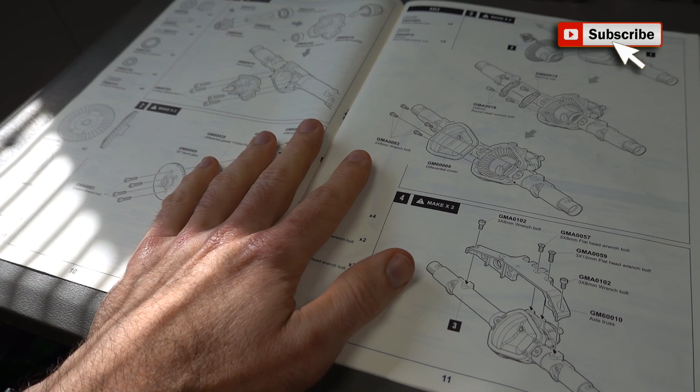GOM rock buggy kit. This is a plus kit, it comes with additional parts and all that kind of stuff. I showed that in the previous video, go check that out if you want, just a quick unboxing.

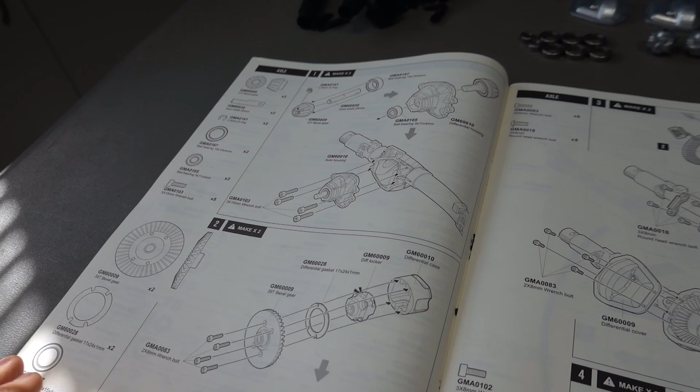But we're going to start building this kit. First up, we have to make the front and rear differentials. It says here on top you have to make 2 of each of these. So I've got all the parts nicely laid out there.

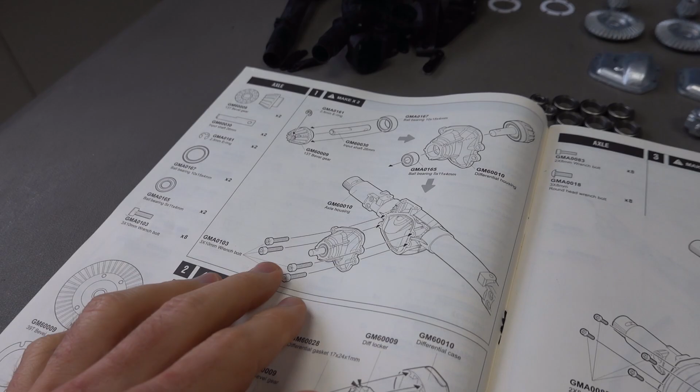Using my Team Fast Eddy grease, but you can use any grease you want, even marine grease if you want to run it through water. I have all the parts here, I'll start going through all of these and putting them together, and I'll show you the step by step in between. I like having everything set out, ready to go.

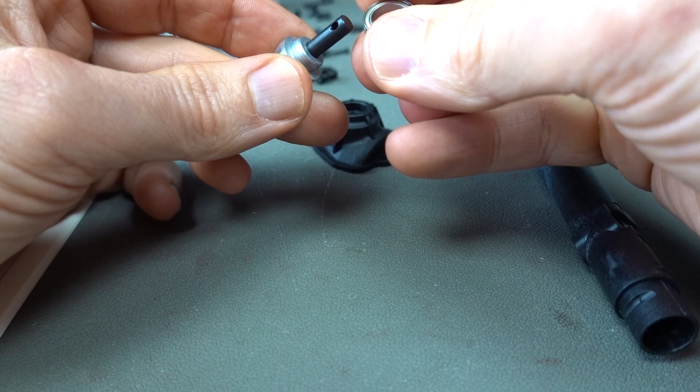Let's get cracking. So first up here we've got our little input shaft, and then we get our 13 tooth bevel gear. Lock it off with a 2.5mm E-ring. Put it over a 10 by 15 by 4 ball bearing, just like that, so it spins.

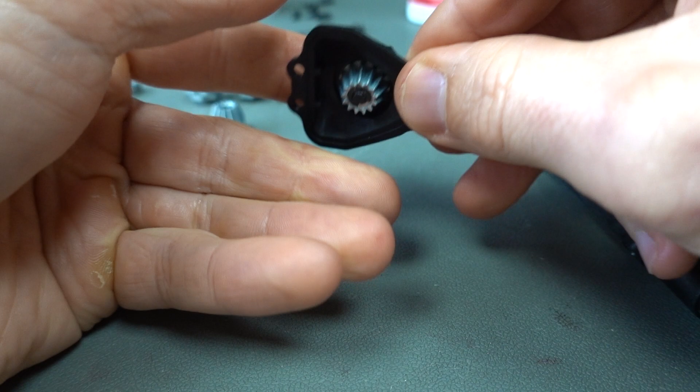And then we get, this is your differential housing. They're identical, so basically you slide this end in, line everything up, push it in there like that, and then lock it off on the other side with a 5 by 11 by 4mm bearing, just like that.

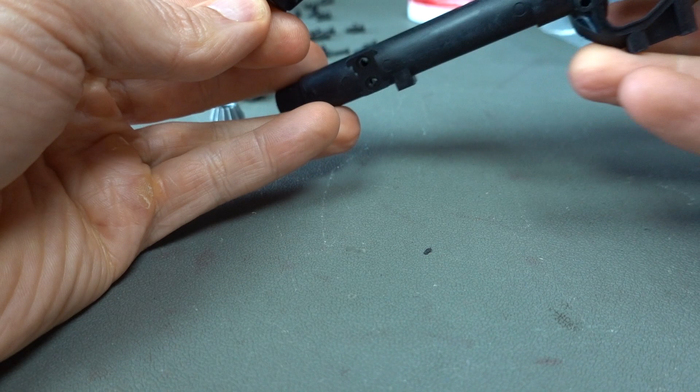That's it, so you're going to make 2 of them. Then get your axle housing, this guy right here, line it all up like that and screw it down. They use 3x10 wrench bolts, make 2 of those. But there it is, that's that first step done. That's what you're left with.

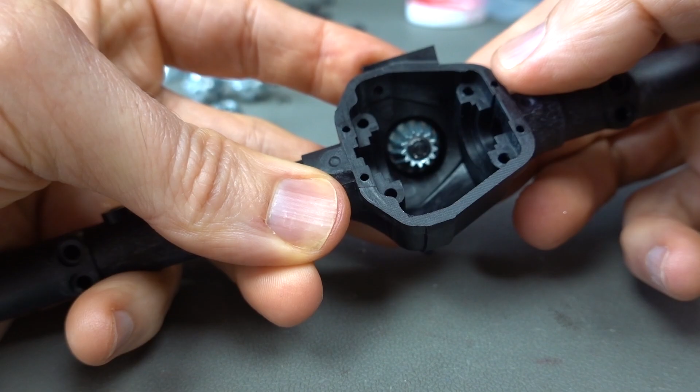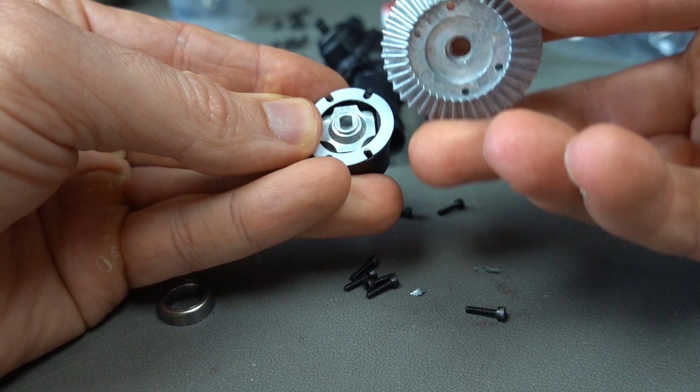Pretty simple. Next up we're going to be making the actual differential case. Basically you get your differential case, these are identical, the diff locker on either side. Slide it into those grooves, get your gasket, just like that, and then you get your bevel gear, line it all up and send it home. You've got to use these 2x8mm wrench bolts for all those, and that's it.

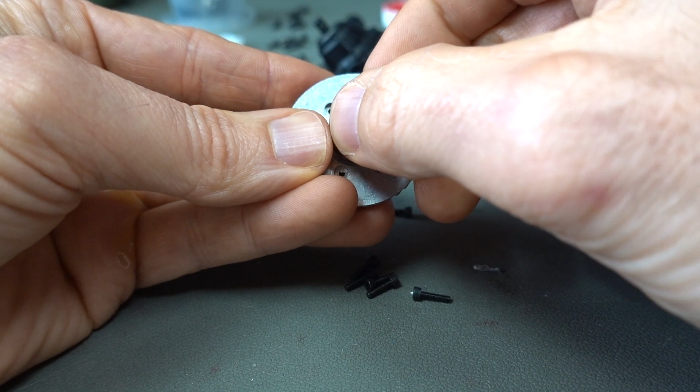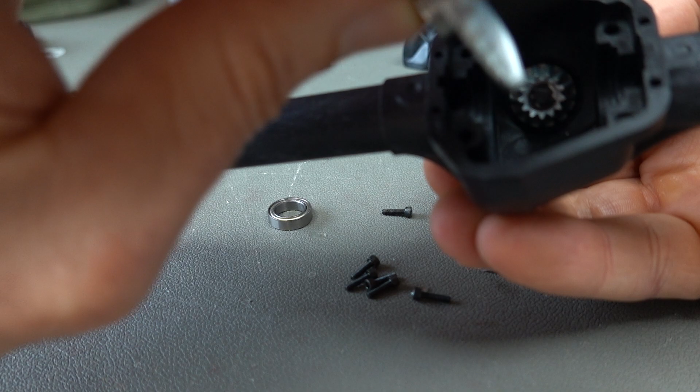And on either end here, you use your 10 by 15 by 4mm bearings. Once that's done, like any typical diff, you're going to slide that into there and cap it off with 2 of these bearing caps. I'll put all those in, I'll show you, and obviously you're going to grease it up, and that's that. There we go.

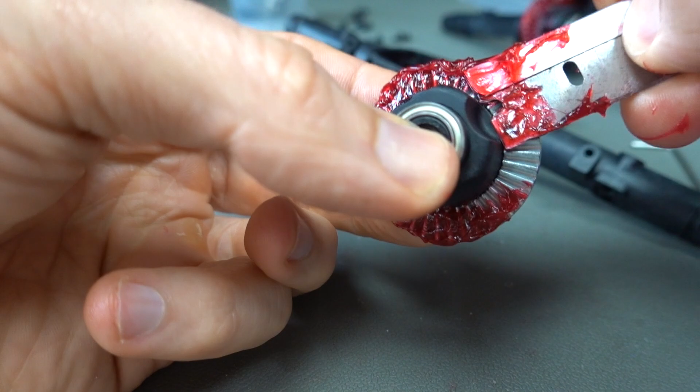You pack it up as much as you want, it's not really going to hurt. We just want to pack the hell out of it. This is all I do, I'm going to get this flat blade, old razor, and just kind of run it around the edge there. That's it. Obviously if you put more in there, it's going to waterproof it, depends on what you use.

If you use marine grease and all that kind of stuff, it can only go one way, just like this. That's it.

Like butter, that's it. Now we're just going to get these, they're called bearing caps, and they just sit in there, and we're locking them with 2x8 wrench bolts.

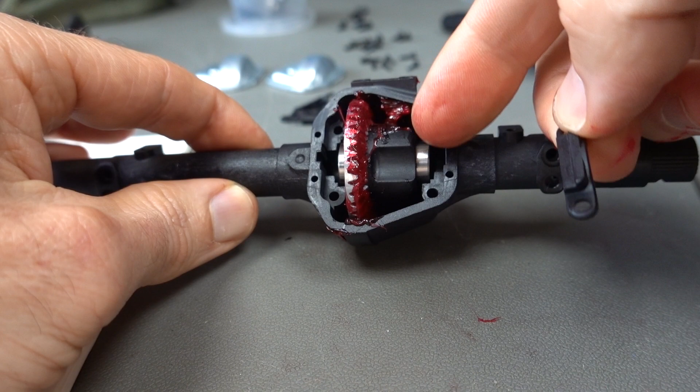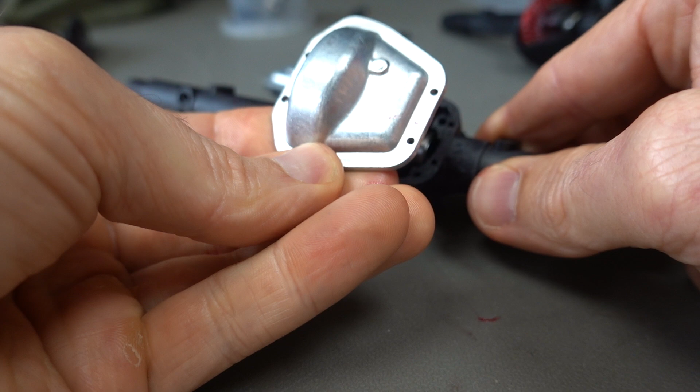Then what we can do, once that's all on, I get the pumpkin here. There we go. Sorry, I lock these away with 3x8 round heads, and then we use the wrench bolts to lock all that in, and that's the front and rear diff done. There we go, both of them are made.

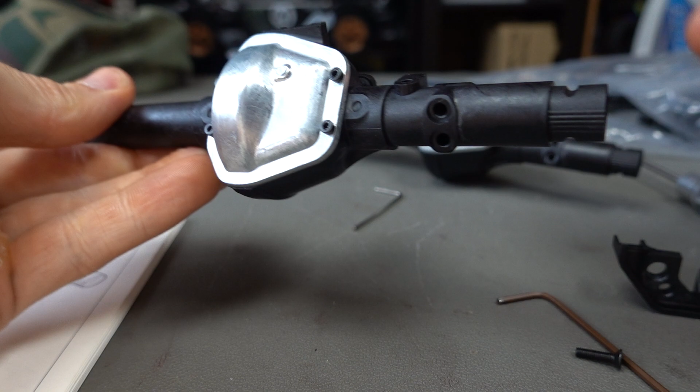Jump to step 4, which is this called an axle truss. Here's one without it, and basically it just sits on top of here and ties everything together. Now you've got to make sure when you put this guy on, it sits on there like that.

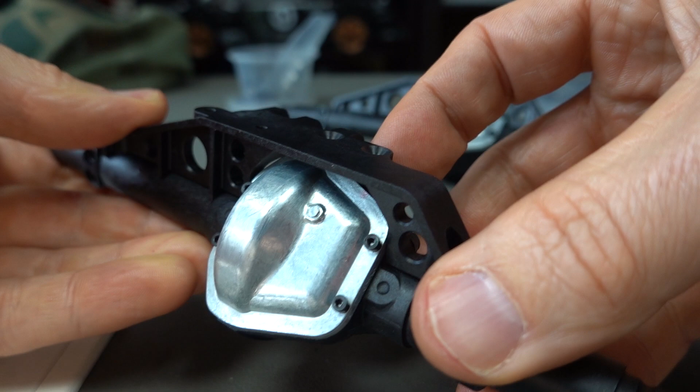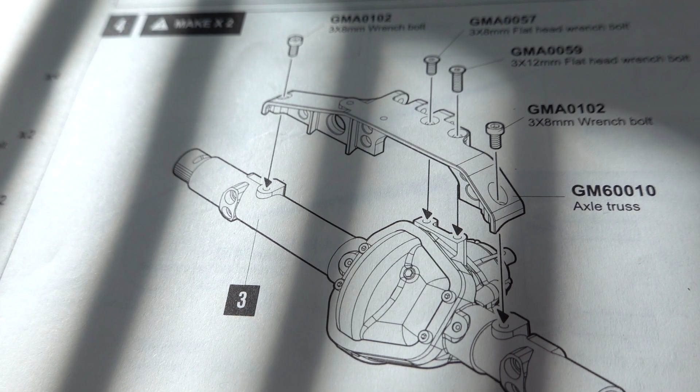It's pretty self-explanatory. The only thing to take note of is these 2 screws up here are longer, and there's a shorter one. So the longer one, see, it's got more thread, it goes in this one up here, and they're both countersunk, and the shorter one goes the other side. Pretty self-explanatory, it says it in the manual there. But that's it, put those all together, and we can move on to the next step.

Now in step 5 we're going to be concentrating on the front axle alone. So we need to be getting these, they're called C-hub carriers.

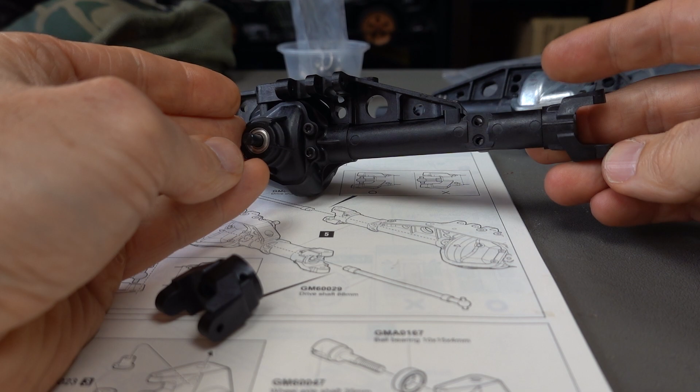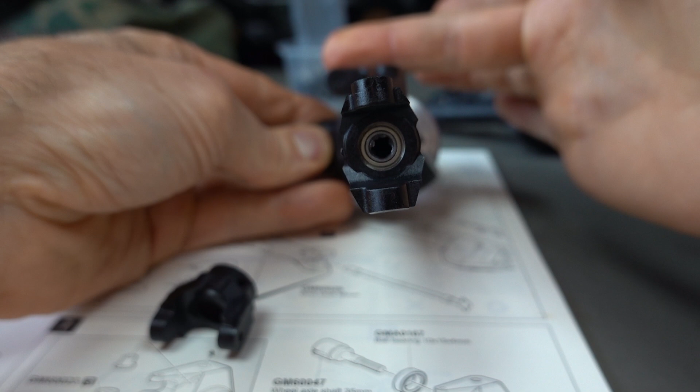So if you're looking, this is facing the back and that's facing the front. This is obviously the right one here. When you're looking at an angle like this, the top plate should be level and you should have about 10 degrees. The C-hub should be facing backwards, and that's easy to do.

So what happens, you get a bearing 5x11 by 4mm, and then you get this, your left C-hub carrier, and you see on the back here there's a line. That line has to match up with the middle line here, so it's pretty simple. Roughly, well, not roughly, exactly like this.

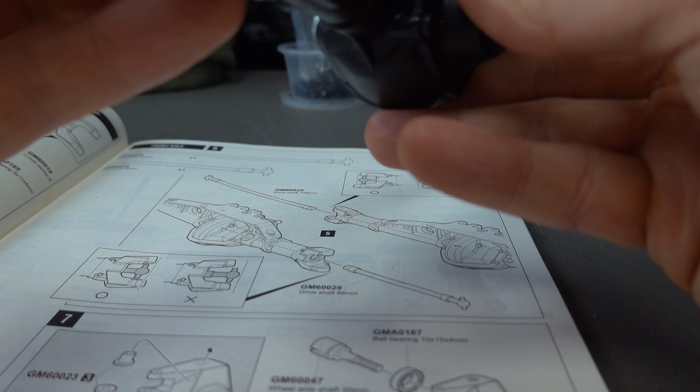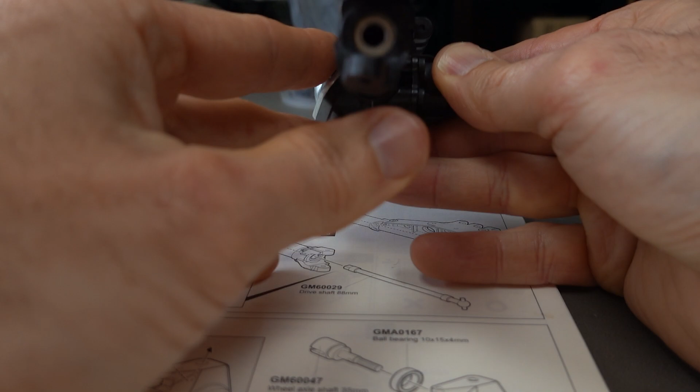Slide it on, and now if this is level, the C-hub carrier is on a 10-degree angle facing backwards. That's all it is. You can always double check that line is pretty much in the center of that circle, and the same on the right side there.

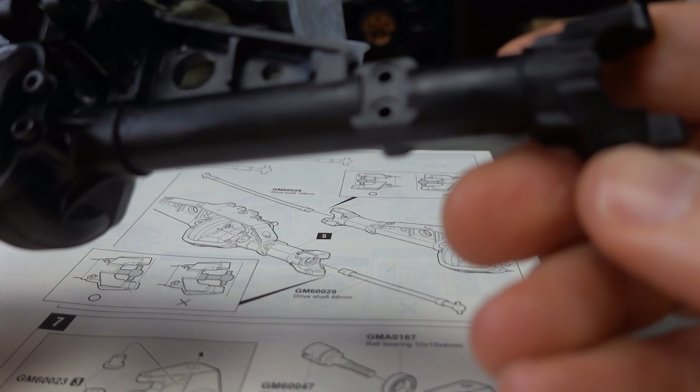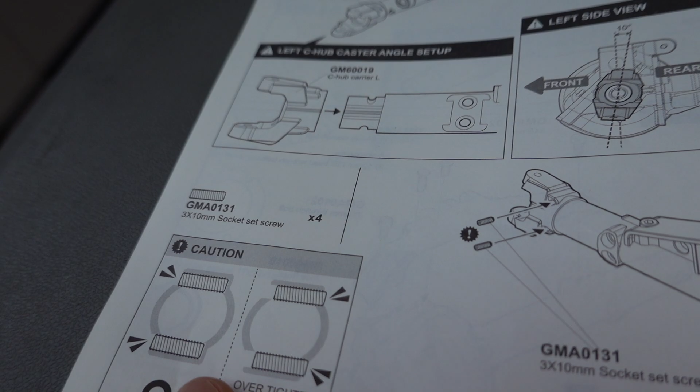So once that's all done, we get our 10mm grub screws and screw them from the front in like that. Don't over tighten them, because if you do, you can puncture through the other side. It always tells you little exclamation mark type of things. If you go too deep, it's not always a good thing. You come through the other side there, and that's it.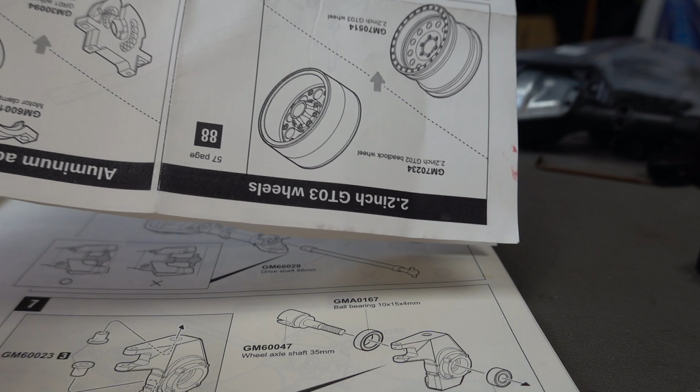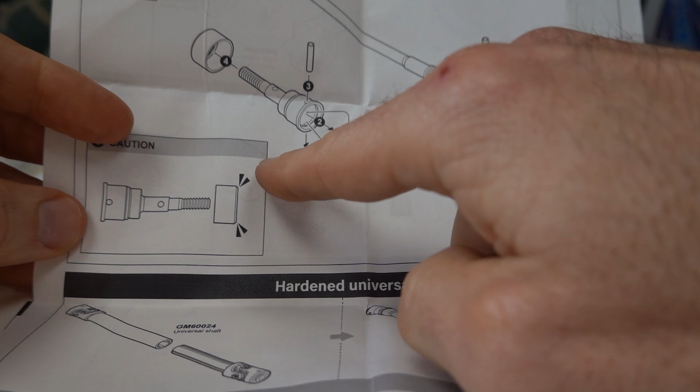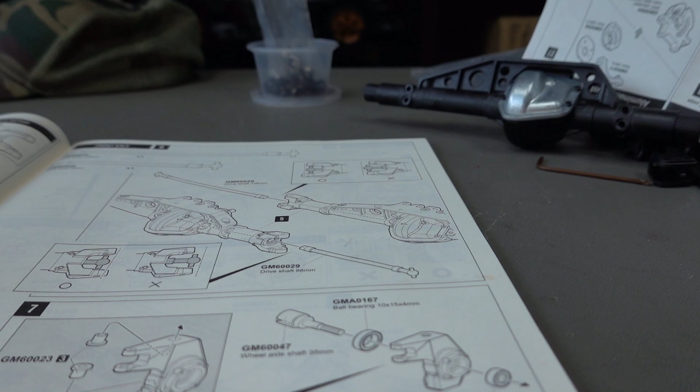What's cool now, because this is the plus kit, you get a little extra bag like I showed in the unboxing, and we'll be needing the CVD axles just here. They give you extra turning, like a greater turning radius as well. But when you open the plus kit, it's got its own instruction manual, and it tells you, for example, page 13, step 6, 7, and on page 14, step 8, to replace the current axles with the new ones. It gives you its own little instruction manual for what to do there as well.

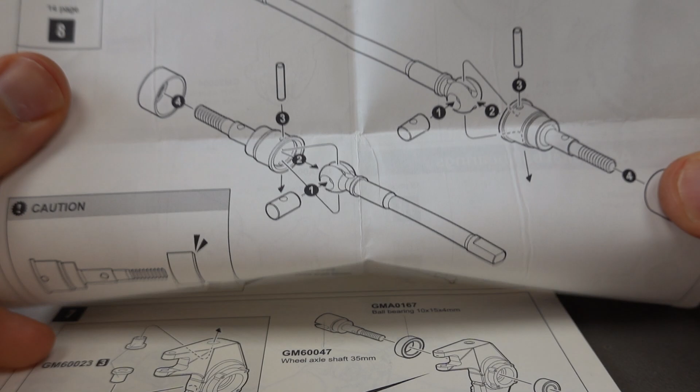So nice, so it's a CVA kit. Okay, I made the CVAs off camera, super easy, nothing special there. And now obviously they come in two different lengths because the axle is shorter and longer on one side.

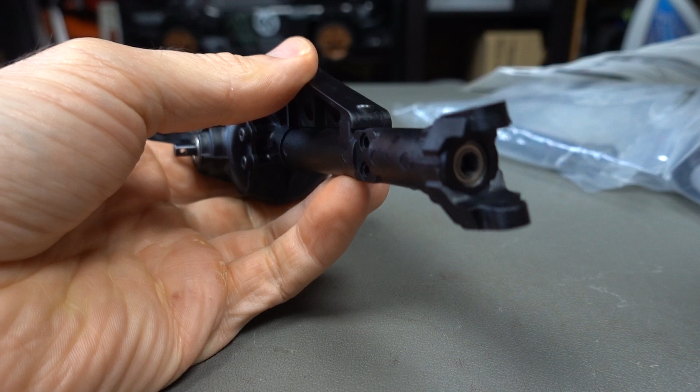Very easy, it's got an insert in there, and it's got to mate up with the actual diff that we made earlier. I put a little bit of grease on the end there - you don't need to, but I do, just in case. It's got to kind of rotate a bit until you feel that click in, and that's it. Once that's pushed in, you know it's all connected.

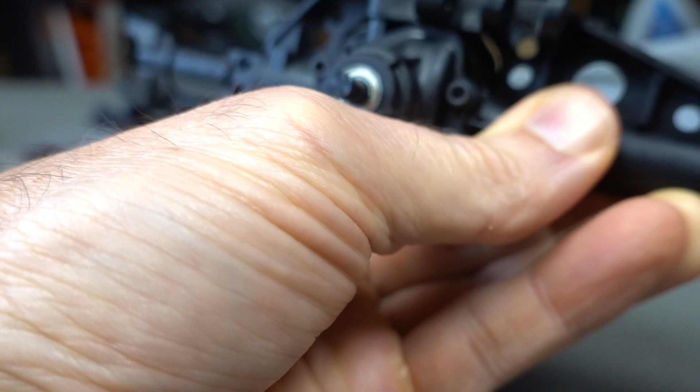As you can see the input, or the output shaft sorry, turning. There we go, just like that. Now I'll do the other side, and then we can actually assemble the steering knuckles.

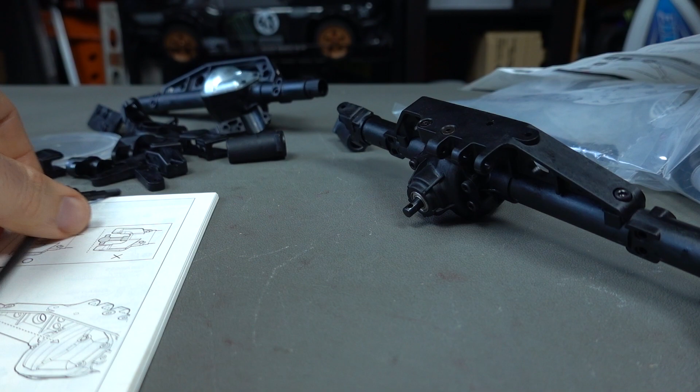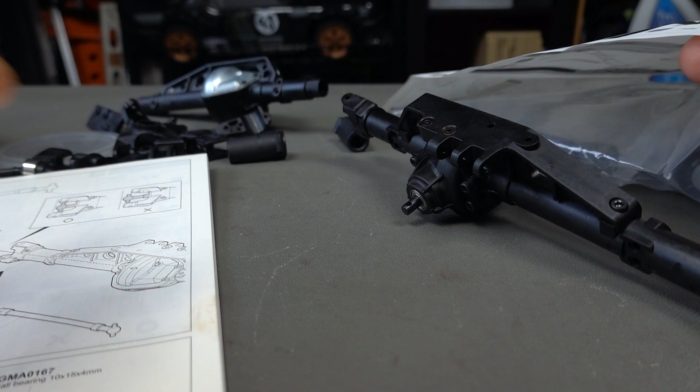So the steering knuckles with the basic kit come with plastic knuckle bushings, but when you get this extra kit, it comes with these brass steering knuckle bushings, so I'll put those in. So there is your brass steering knuckle bushings.

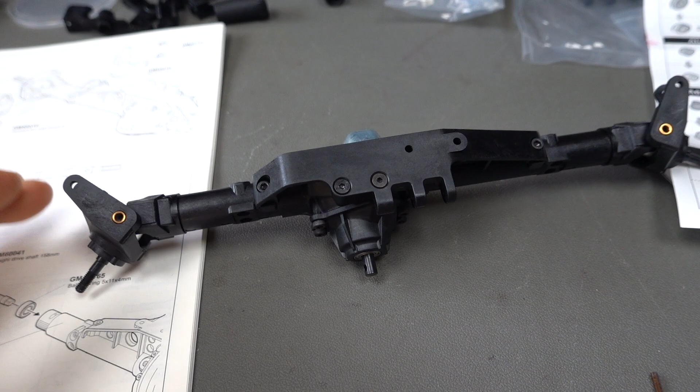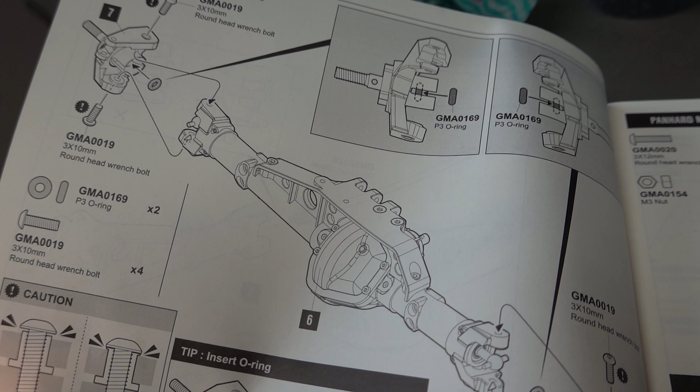So you put the left and right one on, and pay attention they face forward because the steering rod goes in front of the housing there. And because this is the upgraded kit, we don't need to do this step - you'd normally insert that little rubber O-ring to make up the gap, but we don't need to do that, we just skip that.

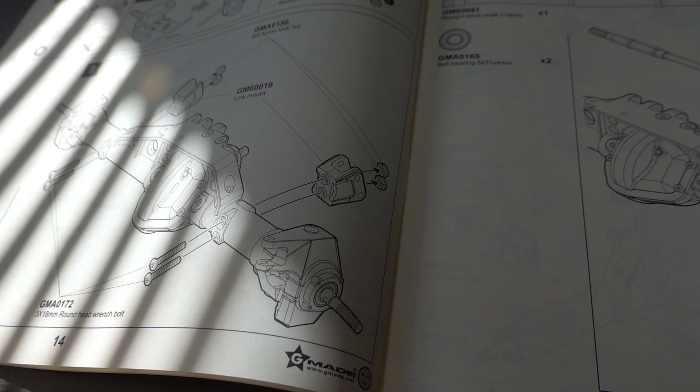But we need to install the left and right knuckles, so we'll screw them down with some 10mm bolts, and then we can actually install some of the other brackets or the link mounts onto the axle. Alright, there we go. So I have the link mounts just here on either side, and also I went ahead and put on the Panhard axle mount just there.

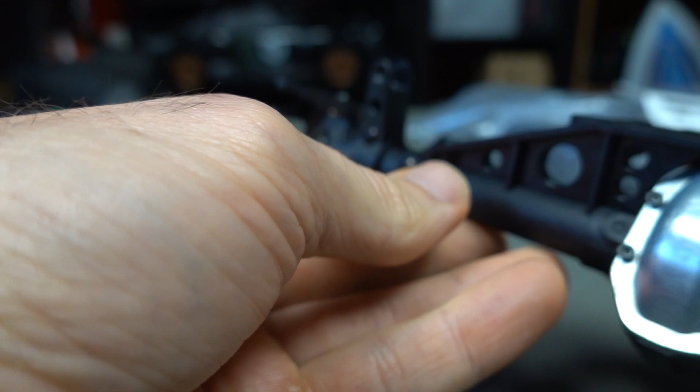One thing to note is when you update to these new and improved CVA shafts, the steering angle increases - from stock the drive shaft is, I think, 30 degrees, and the CVA kit makes it 45 degrees, so you get a lot more steering angle.

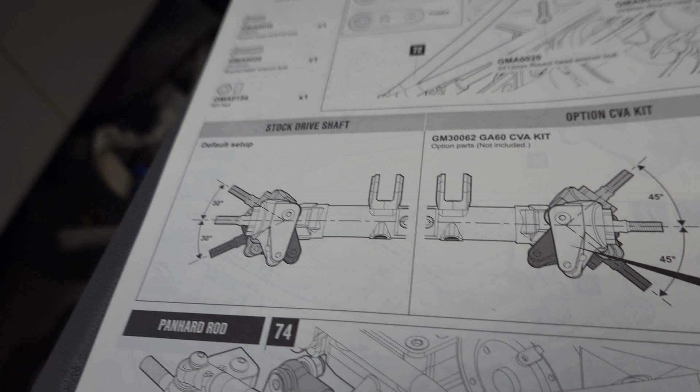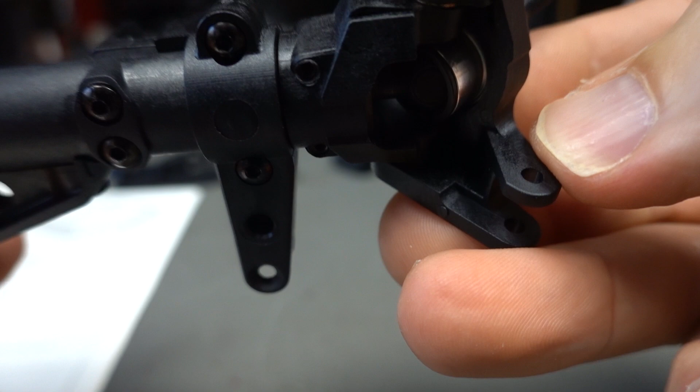And what's funny is further on in the kit it tells you to cut off a little part, a stopper, but I don't think you need to cut it off because I can't see that actual part they need to cut off here. It seems maybe that's an additional, like an older piece or something, but on this one it goes all the way and it actually stops up here. So, I measured it with an angle gauge, and that's 45 degrees.

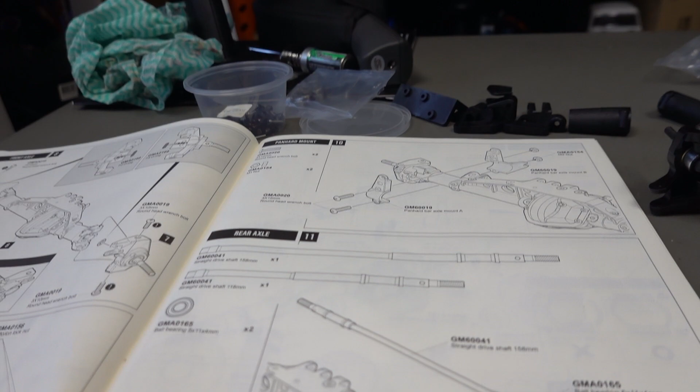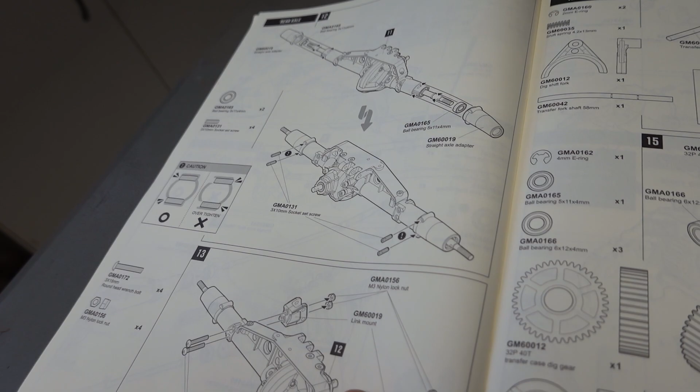Moving back to where we are, I'll install the rear axles, put in some ball bearings and the straight axle adapter, and then move on to attaching those link mounts. That's pretty boring, and then we'll get to the transfer case.

Rear axle all done, locked and loaded. That part is all finished.

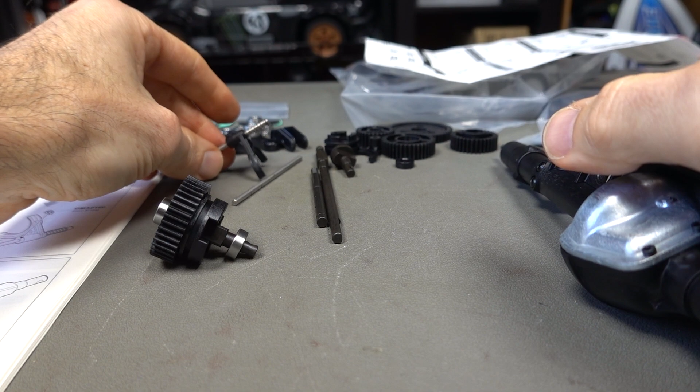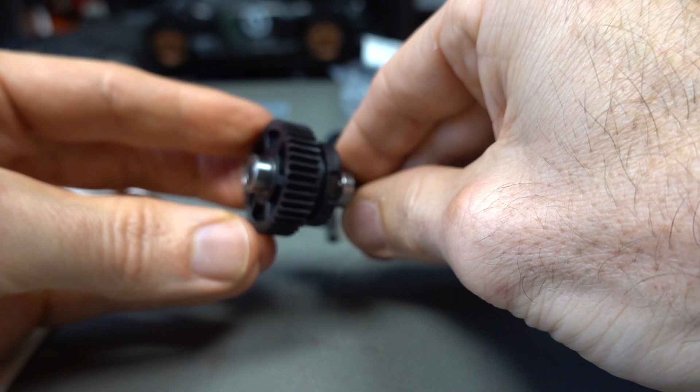Now we are starting on the transfer case. I just did this off camera, nothing too fancy. That's the shifting fork, so we need one of those, and we started on this particular gear. It's got different size bearings, 5 by 11 by 4 and also 6 by 12 by 4, so the large ones go in this gear.

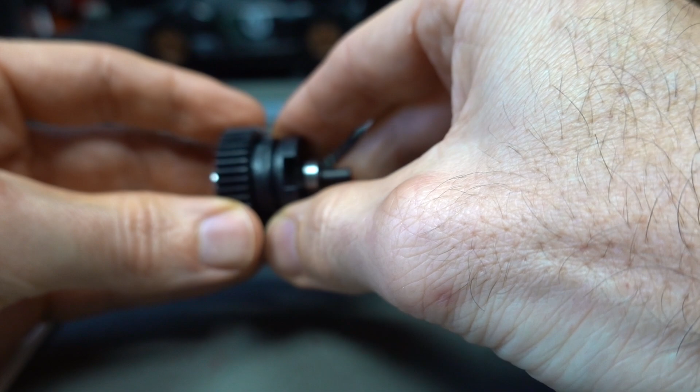This shifts like that and locks into this particular gear. Pretty easy, nothing fancy, just pay attention to the direction that you need to put them in. Pretty self-explanatory.

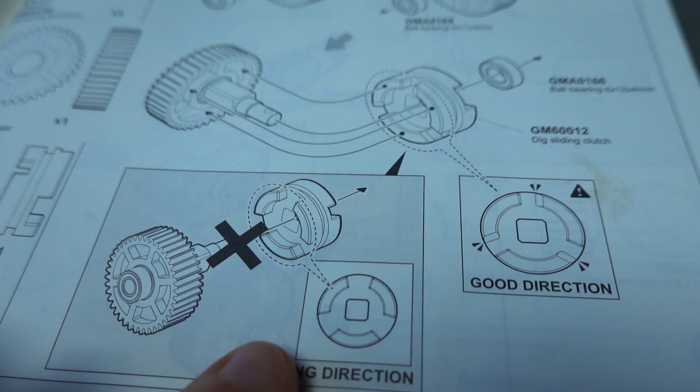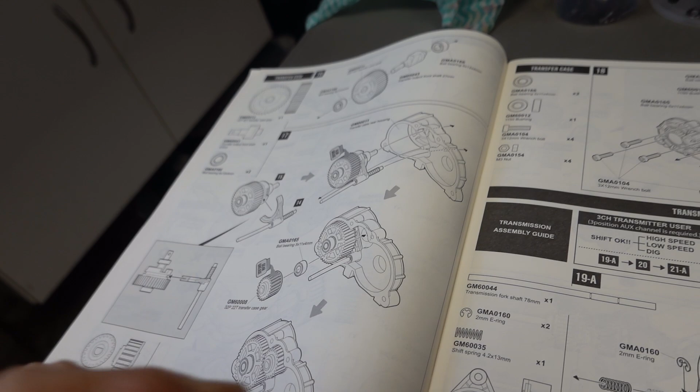Flip them over this way, and now we'll go to these larger gears. Also with the Pro kit, you actually have some more bearings that you use, I believe, in here.

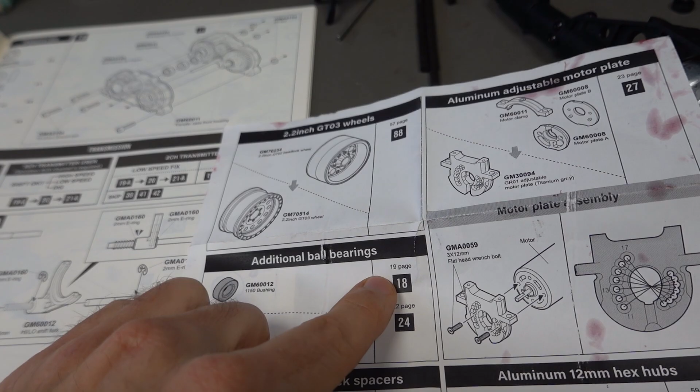Page 19 - instead of using the bushes, you use the bearings. So page 19, step 18, and page 22, step 24, you use the bearings that's supplied in the Pro kit. But got all these parts ready.

Nice, and these are all 1-to-1, so you just line them up to find out all the parts you need. So we get the transfer output front shaft, some ball bearings, and put it all together.

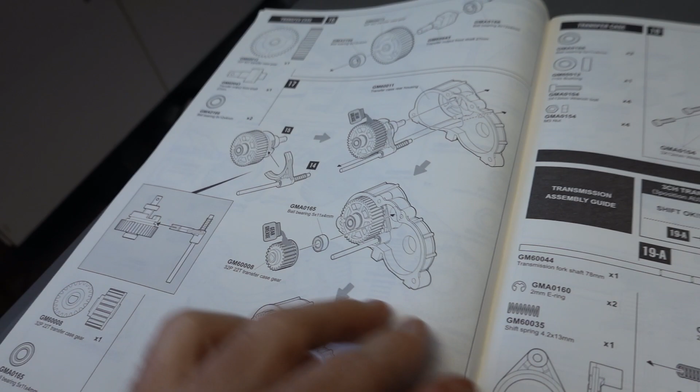We can't forget the grease, but I'll do that off camera, and I'll put them all in here, and then we'll see the final step.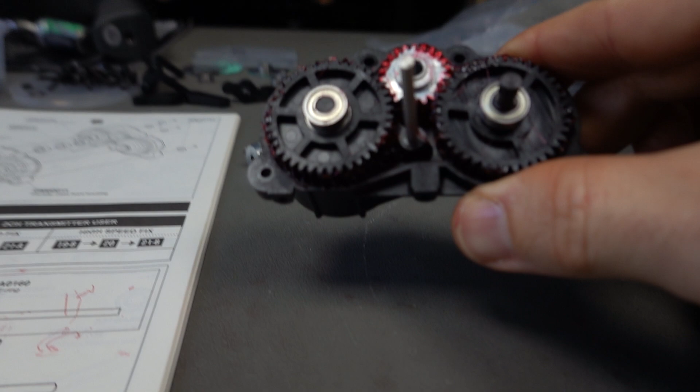There we go, all lubed up. It's funny, this gear here, the transfer case gear, is just floating around in there, but as you get to step 18, you kind of sandwich it away with more ball bearings, and this is a Plus kit.

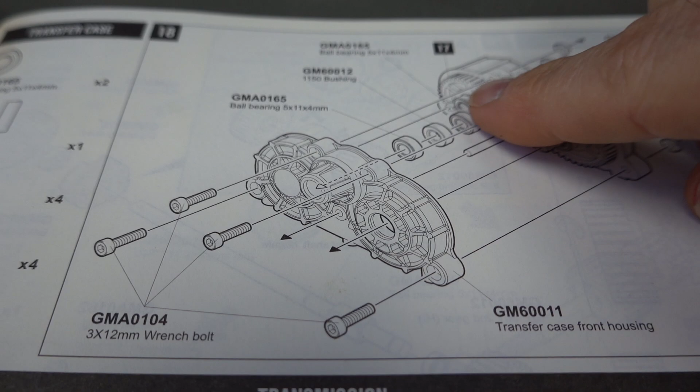It takes away one of the bushings that are in here, so it says 1, 2 and 3 here. It's kind of hard to show on camera, but this is what I mean - normally you'd have bearing, bushing, bearing. Now this one you have just 3 bearings, so I'll put that together and move on.

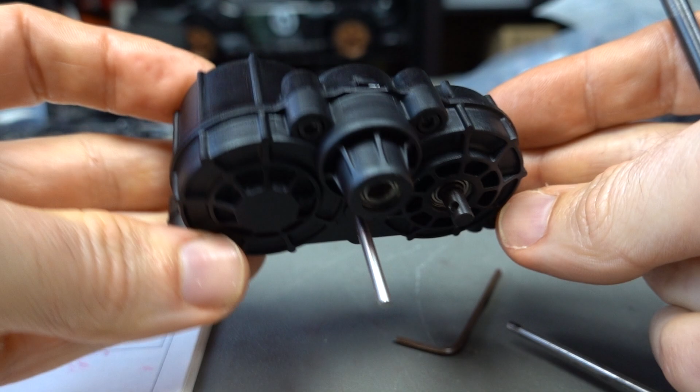There we go, all nice and set up. Use 4 screws to lock it all together, and obviously this is going to be a shaft in here later, but I'll just show you, put it in here. It's got high, low and a dig setup.

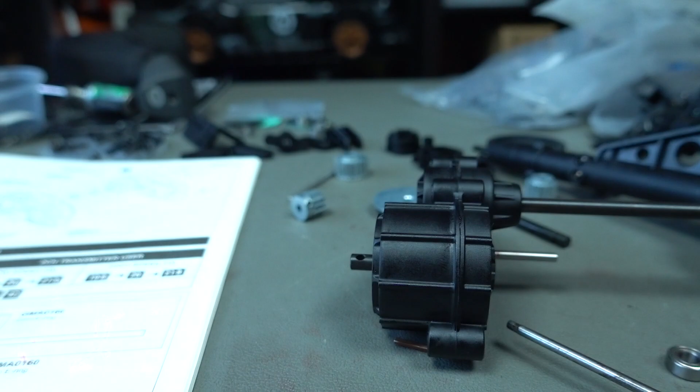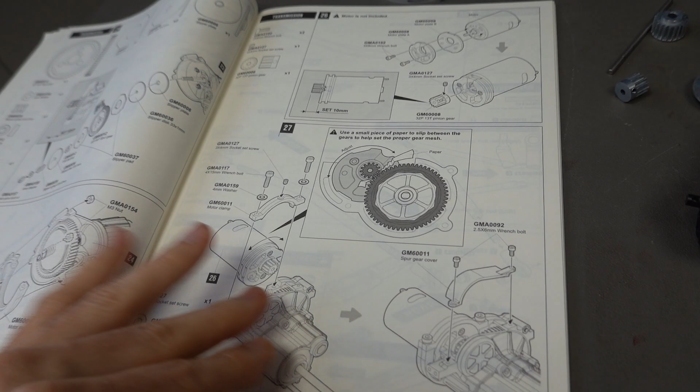So the transmission is very similar. I'm not going to do that as well on camera - it's all the same stuff, shifting forks, plastic gears, casings, all that kind of stuff. So I'll get up to here and show you how that looks, because I don't want to keep the videos too long. Let's have a look. And there we go.

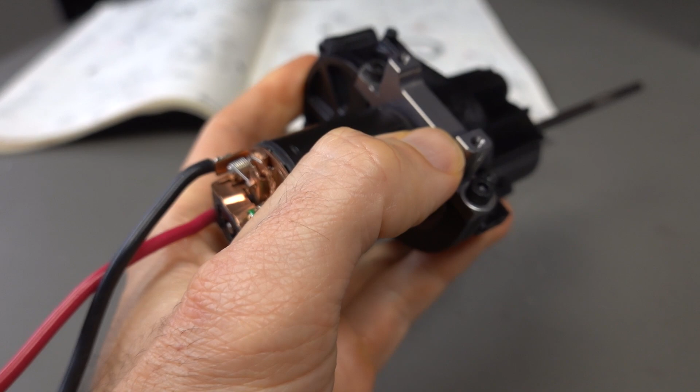All locked and loaded. Good thing about the Plus kit, you get this really nice aluminium adjustable motor mount, and it gives you really clear instructions on what hole you need to use if you change pinion.

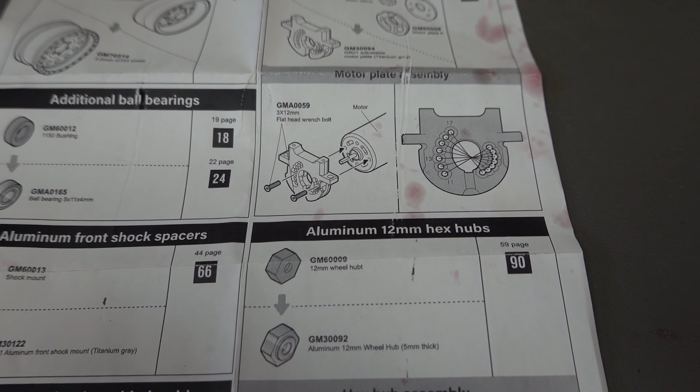So it's all stock as it is, using this Hakmoto V2 45 turn brushed crawler motor.

I was going to get the system out of the other Jeep, but I thought I'll just leave it as is and see how this goes. But that's it, everything is buttoned up, ready to rock and roll.

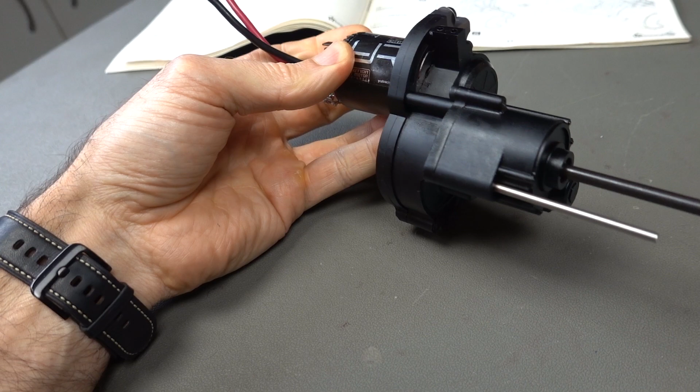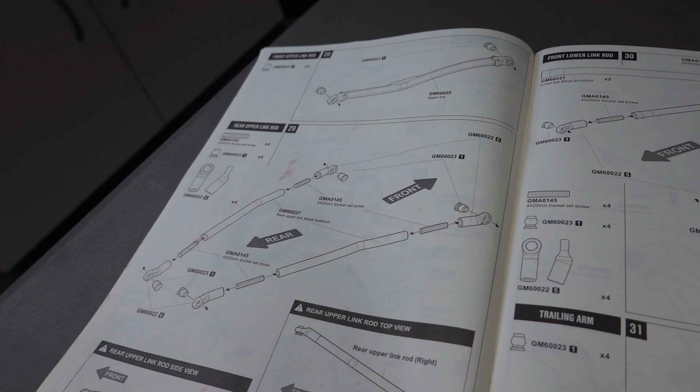I think I might leave this particular video, don't make it get too long, but coming up we have to do the upper link rods. I'm going to put those together already because they're super simple, nothing to those, so in the next video we are ready to go.